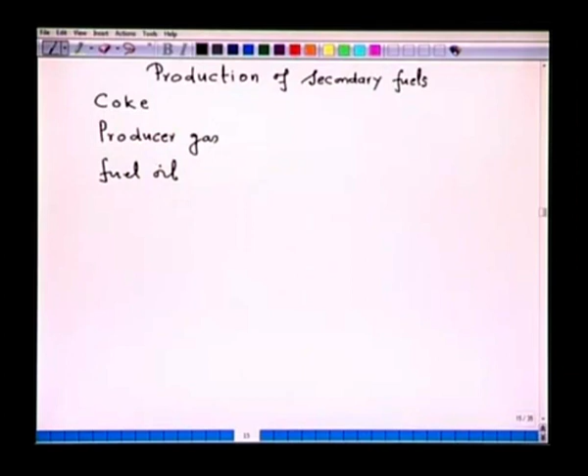So the important secondary fuels which are produced from fossil fuel: one is the coke, another is the producer gas, and third is the fuel oil. Now all these three are called secondary fuels because they do not occur as such in nature, they are derived or produced from fossil fuel, that is why we call them secondary fuel.

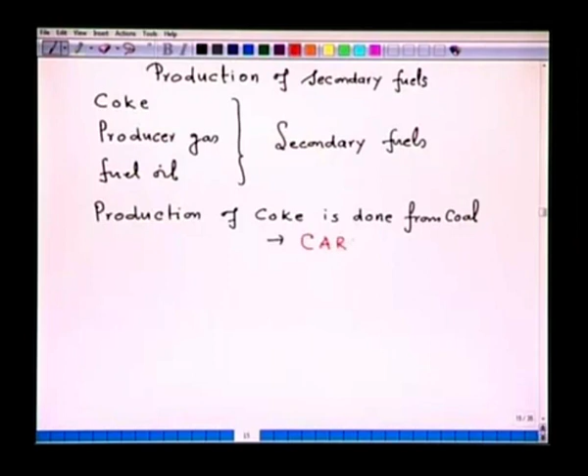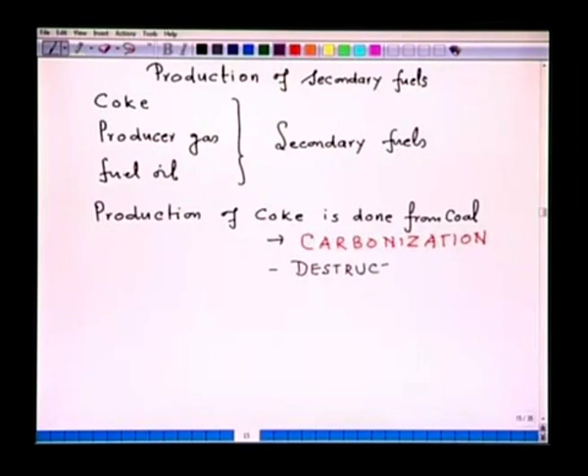Now the production of coke is done from certain quality of the coal, normally the bituminous variety of coal, and this process is called carbonization. Or this process is also called destructive distillation of coal.

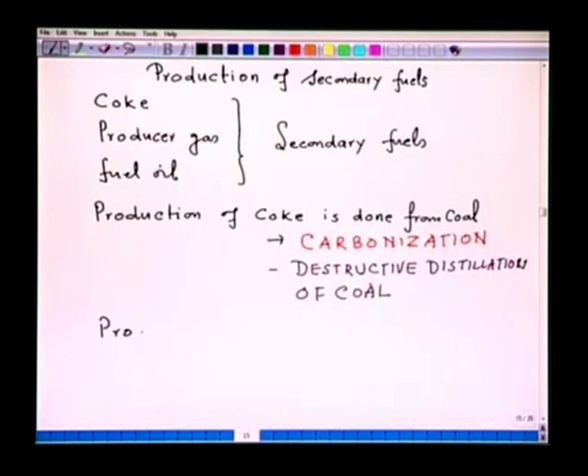For the production of producer gas, it is again done from coal, and this process is called gasification. So in gasification the solid fuel is converted into the gaseous fuel for some applications.

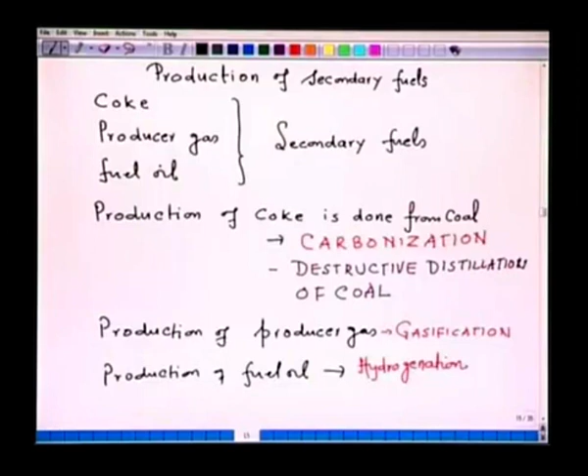The production of fuel oil for certain cases is done from coal, and this process is called hydrogenation. So from these three processes, carbonization, gasification and hydrogenation, the primary fuel can be converted into the secondary fuel, and the objective of production of secondary fuel is to meet the requirement of certain processes.

Now let us take first of all carbonization. As I have already said, carbonization is to produce coke from coal. Now why is this required? All of you are aware that in the production of hot metal by blast furnace, coal cannot be used.

Blast furnace is a counter current heat and mass exchange reactor. In this reactor, the burden which consists of iron ore, coke and limestone, it travels downward, and the upward gases flow like CO, CO2, hydrogen and nitrogen.

So in this counter current movement of burden and gases, the permeability of the bed is very important, or we can also say the permeability created by the burden throughout its downward movement is a very important issue. If the permeability is not maintained, then the upward flowing gases will not flow smoothly and choking will occur, and this is not required.

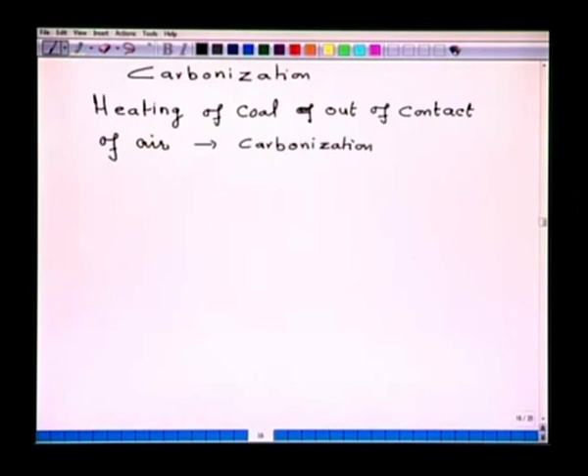Now this can be done at low temperature as well as high temperature. Low temperature of the order of 600 to 700 degrees Celsius, and high temperature of the order of 1000 to 1200 degrees Celsius. For the use of coke of blast furnace quality, high temperature carbonization is done, because what is required is to expel as much volatile matter from coal as possible, so that the coke will be of good quality. So as such high temperature carbonization is of concern for the high quality coke required for the blast furnace application, which you can also call destructive distillation.

Now what does it mean? Imagine if we heat coal out of contact of air. If you heat coal in presence of air, then it will combust and ash will form. That is not required. The whole objective of carbonization is to convert one type of solid fuel to another type of solid fuel. So what we have to do? We have to retain the solid fuel after converting it through the process of carbonization. So if we heat the coal out of contact of air, then what will happen?

If we think that coal consists of volatile matter, fixed carbon, ash and moisture.

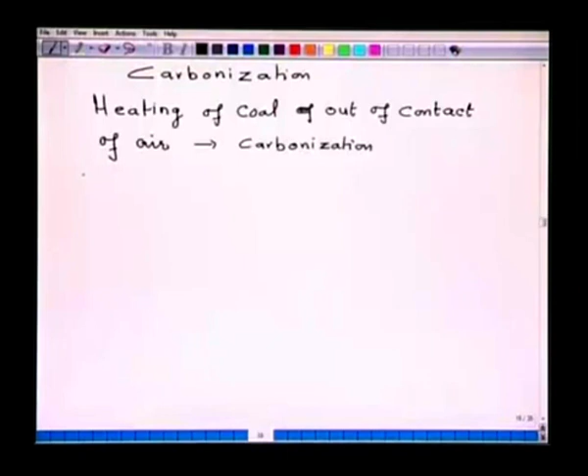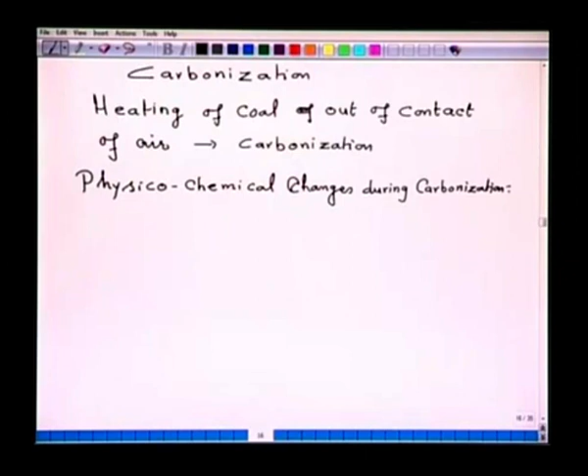So let us summarize the physico-chemical changes that occur during carbonization, as follows. You are heating coal from 25 degrees Celsius and progressively heating to 1000 or 1100 degrees Celsius. The whole objective is to expel the volatile matter of the coal, because the volatile matter creates a lot of problems if used as such for a particular application.

So stage 1 is the primary breakdown of coal at around 700 degrees Celsius, and this primary breakdown yields products like...

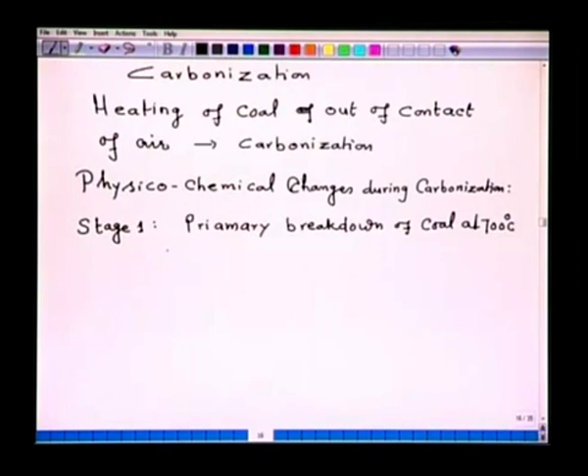H2O, CO, CO2, H2S, aromatics, paraffins, olefins, nitrogen compounds, etc.

Why does this happen? Because coal consists of carbon, hydrogen, nitrogen, oxygen and sulfur - that is what coal consists of in terms of its ultimate analysis. The organic bonds are there, so during heating the bonds will break, and wherever an element can react, depending on its affinity, it will react, and depending on the concentration they will react. Carbon is at a very high concentration, whereas the concentration of oxygen, hydrogen, nitrogen and so on is very less. So accordingly the reaction will occur: hydrogen will react with carbon, hydrogen may react with nitrogen, oxygen may react with carbon, and so on, because no air is present.

Now in this particular stage the coal also swells, because coal contains all sorts of organic compounds - it is of plant origin, so there are constituents which have a swelling tendency. Because of the swelling of the coal, these volatile matters in the form of gaseous components will be eliminated. So mind you, in the production of the coke, considerable swelling also occurs.

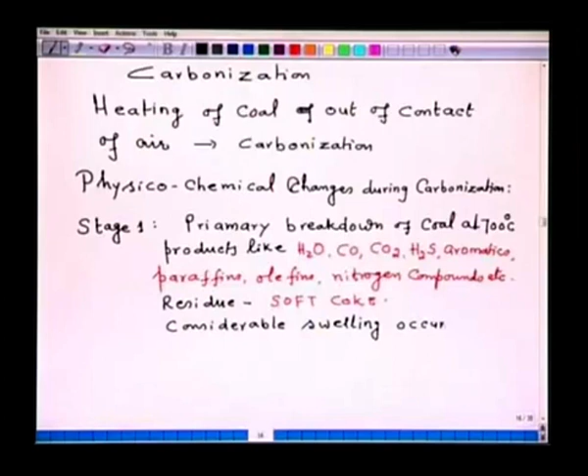In fact, swelling is one of the properties that is desired in coal which is suitable for conversion to coke. So if the coal swells, then it should resolidify to get you again the solid coke, otherwise it is gone.

Stage 2 - in stage 1 you got the soft coke, but that is not useful for blast furnace purposes. For all other purposes this coke can be used at 700 degrees Celsius, which is called low temperature carbonization. Now for blast furnace purposes you have to heat it further.

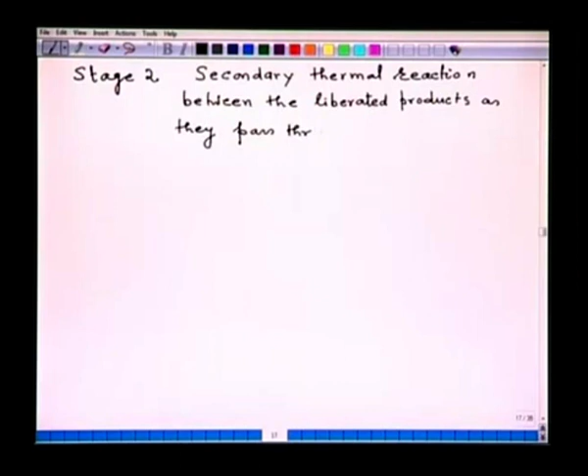So in stage 2, there is a secondary thermal reaction between the liberated products as they pass through the hot coke and coke oven walls.

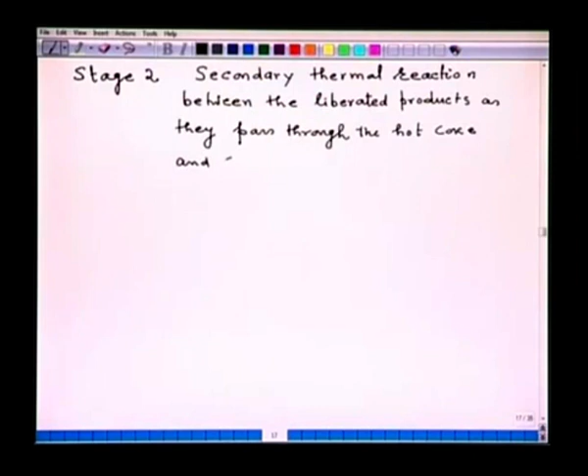As a result of this, evolution of hydrogen and formation of aromatics and methane occurs at around 700 degrees Celsius. The formation of NH3 occurs due to decomposition of nitrogen compounds.

Then in stage 3, because the residue obtained on further heating undergoes further removal of gases, since all the volatile matter has not yet been expelled at around 700 degrees Celsius. So further heating to 800, 900, 1000 and 1100 degrees Celsius causes more and more volatile matter to be expelled, and more and more gases to be formed.

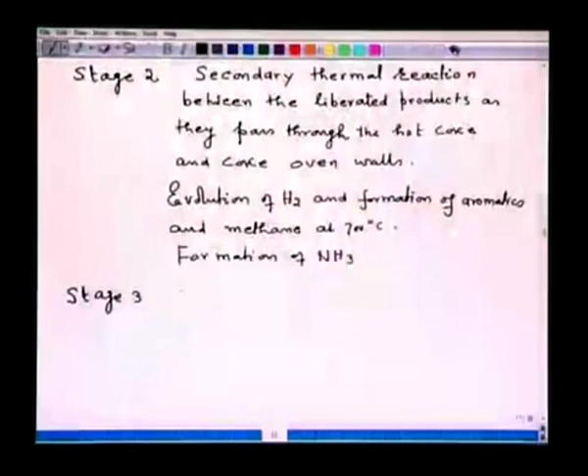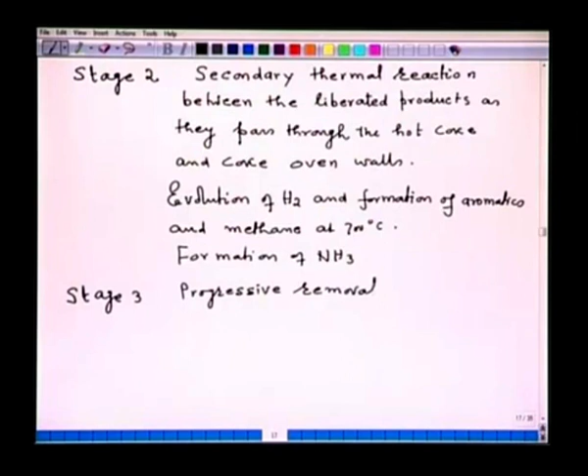So stage 3 involves progressive removal of hydrogen from the residue, and hard coke is produced.

Now these 3 stages which I have written, they occur when you heat from 25 to 700 degrees. In stage 1, further heating constitutes stage 2, and then further heating up to 1100 degrees Celsius results in so-called hard coke, which is useful. It is important to note that during carbonization...

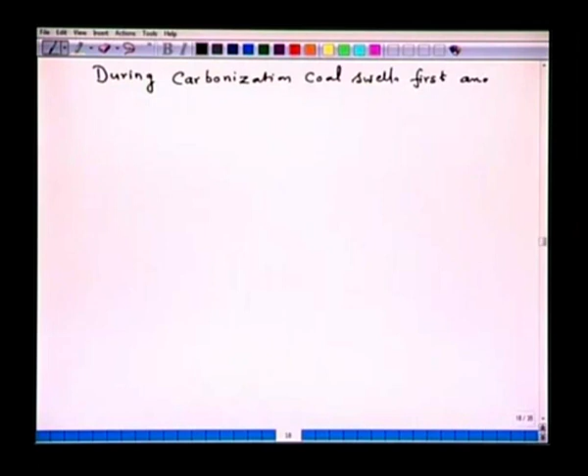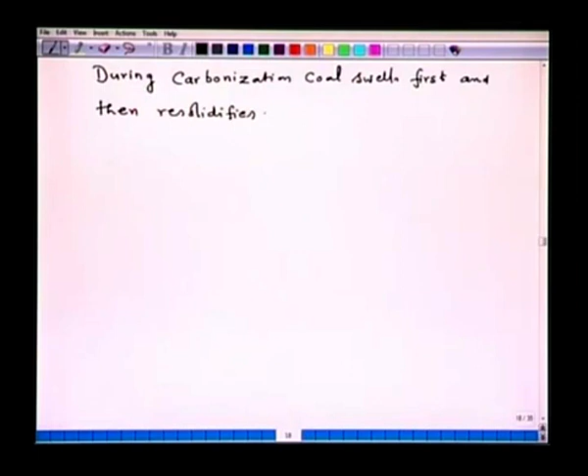Coal swells first and then resolidifies as the temperature rises, and then it is discharged from the coke oven or chamber and then cooled.

The carbonization takes around 16 to 20 hours per 22 tons of coke. So this is about the scientific aspects of carbonization.

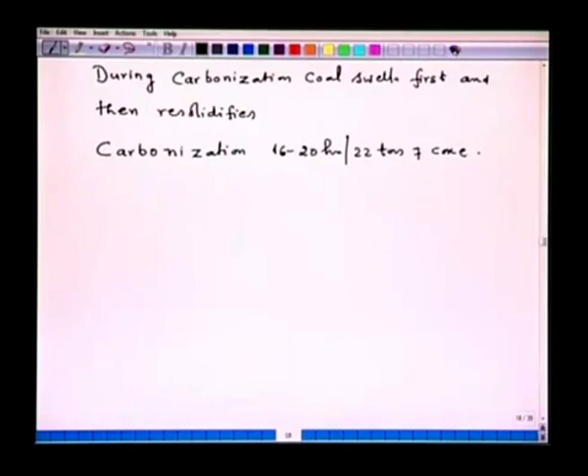What we have seen is that we want to heat coal in the absence of air. That means we have to have a reaction chamber maintained at around 1200 to 1250 or 1300 degrees Celsius, so that coal can be heated to the required temperature. We cannot heat the chamber by direct charging of the coal and combusting it there, it is not possible.

So what we learn from here is that the technological production of coke from coal must meet some requirements. The first requirement that a technology must meet is indirect heating of the chamber. So, the technology of coke production...

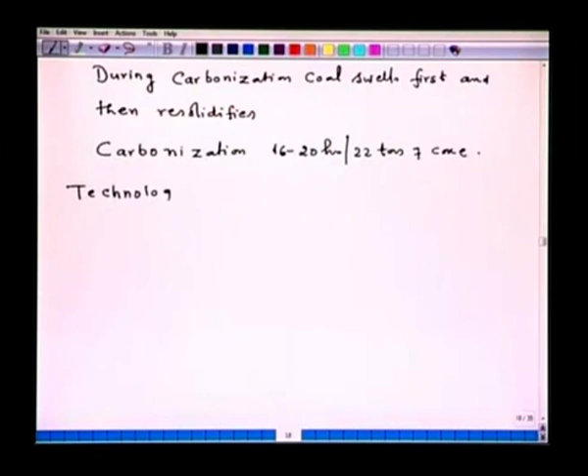Several things are needed, but what I am trying to derive are the technological concerns required after going through the physico-chemical changes that occur during heating coal out of contact with air. The first thing we note is that the coal should be heated indirectly. That means the chamber which you are going to construct cannot be heated directly.

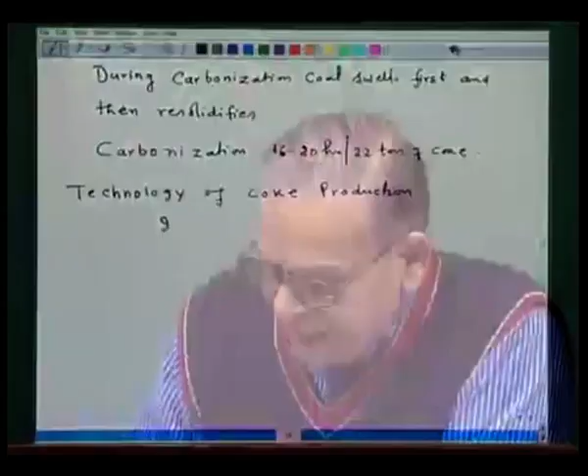Indirect heating of the chamber containing coke is required. That is the first and foremost important requirement of any technology.

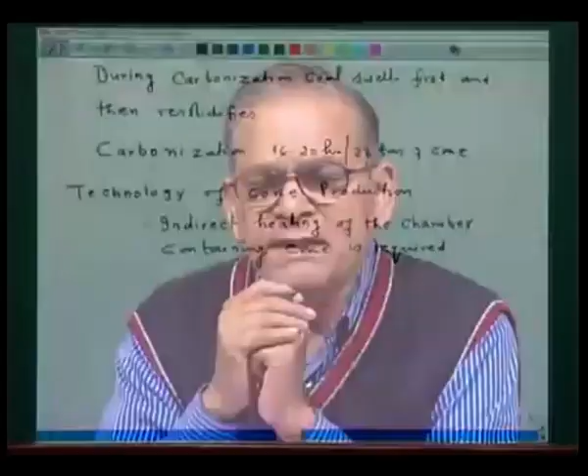The second important thing we can derive from the physico-chemical stages is how to accommodate the swelling which will occur during conversion of coal to coke in the reaction chamber. Because when you charge the coal at time t equals 0, during its conversion which takes hours together, imagine the coal in contact with the wall will swell very high, very large swelling will occur, it may stick to the wall, and at the end of the carbonization process you have to discharge the coke out of the reaction chamber.

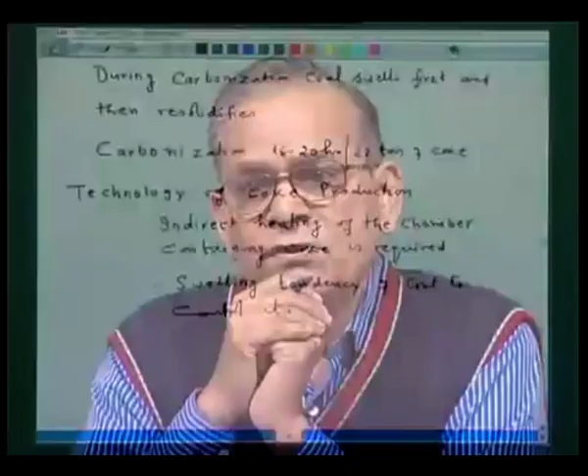So the other important issue is the swelling tendency of coal, and how to control it. One has to be careful while selecting the coal used for conversion to coke. Though swelling is required, if a particular coal swells very high, one has to blend it with a coal of low swelling tendency, so that an optimum swelling during the coking process is maintained.

Among other technological relevances, for example, are the discharge and charging mechanism, because the chamber is closed from all sides. So you have to provide doors for charging as well as for discharging.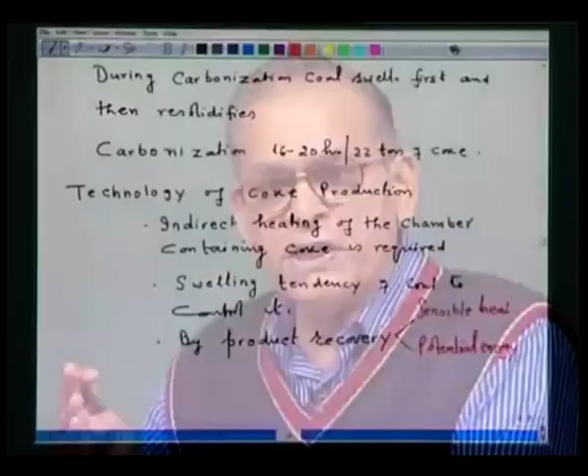So this byproduct not only contains sensible heat, but also potential energy. So an important aspect of the technology of coke production is byproduct recovery, in the sense of recovery of sensible heat and potential energy. Because the byproduct contains hydrogen, which has very high potential energy, methane, which also has a very high amount of potential energy, and of course carbon monoxide, ammonia, they all have so-called potential energy.

So the entire technology, if you think about conversion of coal to coke, should not only be limited to the conversion of coal to coke, but should also consider what is to be done with the product discharged from the reaction chamber, because the product contains a very high amount of sensible heat as well as potential energy.

Also one has to think about the product coke, when it is discharged from the chamber, it will also be discharged at 1200 degrees Celsius, and because you are not producing a ton of coke per day but hundreds of tons per day, if the discharge temperature of coke is 1200, you can calculate the amount of sensible heat the coke will have - it will have a huge amount. So what is the technology considering to do with the sensible heat of the product and byproduct, and the potential energy of the byproduct? In fact, the sensible heat of the product is also important.

Sensible heat of the product. Now, by product I mean coke, all the rest are byproducts. So while designing a technology, what do we have to consider? We have to design a reaction chamber, we have to design the byproduct recovery, and we have to see what we are going to do with the heat produced during conversion of coal to coke.

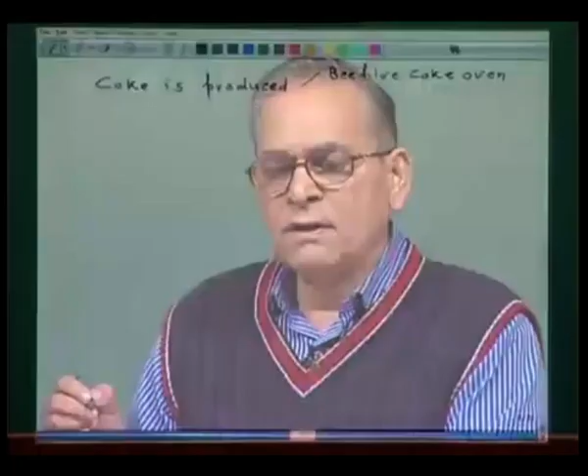So how can it be done? Traditionally, coke is produced in a beehive coke oven, where byproduct recovery was not considered important. So soon this beehive coke oven was replaced by the so called byproduct coke oven.

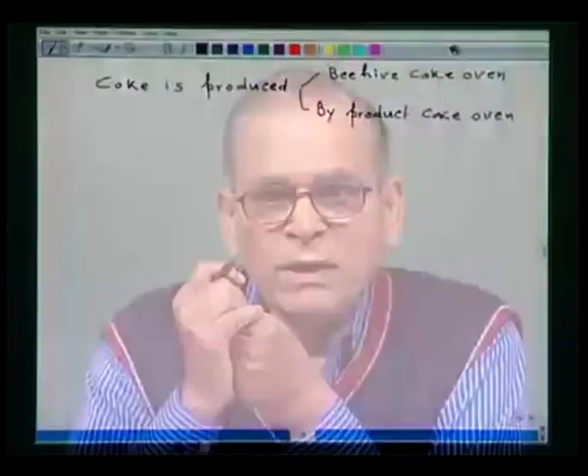Byproduct coke oven - as the name suggests, it is a coke oven which also takes care of the byproduct. Now, a heating chamber, though I earlier called it a heating chamber, you can also call it a coke oven, because here coke is produced. In fact, it is a reaction chamber heated to a very high temperature, that is why you call it a coke oven.

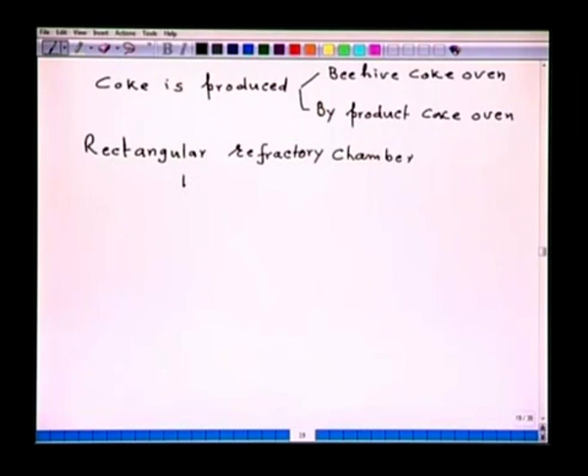So this coke oven is, in fact, a rectangular refractory chamber. The dimensions are of the order of 15 meter by 0.4 meter into 5 meter. It has removable doors at both sides. Why? To enable the hot coke to be pushed out by a ram.

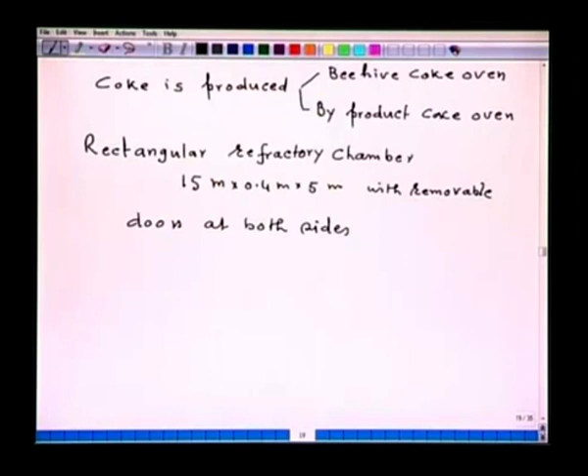Now, typical dimension of a coke oven: its length is of the order of 13 to 15 meter, height 4.5 to 5 meter - in fact a 7 meter tall coke oven is also in use. Then width, on average, it is 400 millimeter, although 600 millimeter width is also in use.

Then its width on the coke side is around 425 millimeter, and on the ram side it is 375 millimeter. Now, can you think of how this coke oven will be heated up?

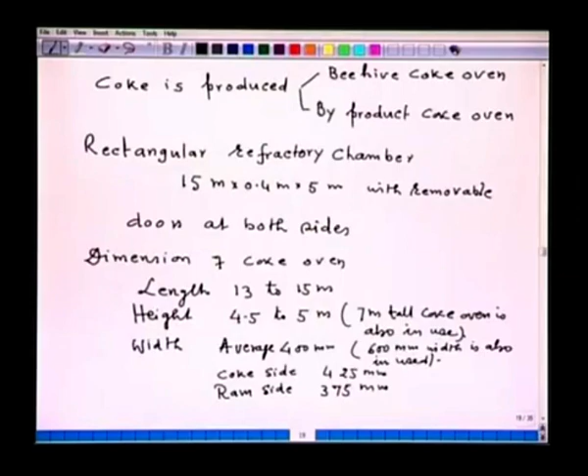You cannot heat it by creating heat inside the reaction chamber, because then air will be there and coal will burn and nothing will happen. How can a high temperature be created? It has to be created indirectly. So for that purpose, throughout the outside wall of the coke oven, flues are cut. Flues, in fact, are the flow passages for the hot gases.

Now, could you get a clue how the coke oven gets heated up? Towards the outside wall, flues are cut, and into the flues the hot gases flow. In order to create these hot gases, you have to burn air and some fuel at some location, and that location has to be connected to the coke oven chamber. The hot product gases flow into the flue. These hot product gases may have a temperature of 1400, 1500 or even 1600 degrees Celsius. The flues get heated up, and from the heat of the flue outside, heat flows inside, and through this mechanism the inside coke oven chamber gets heated up.

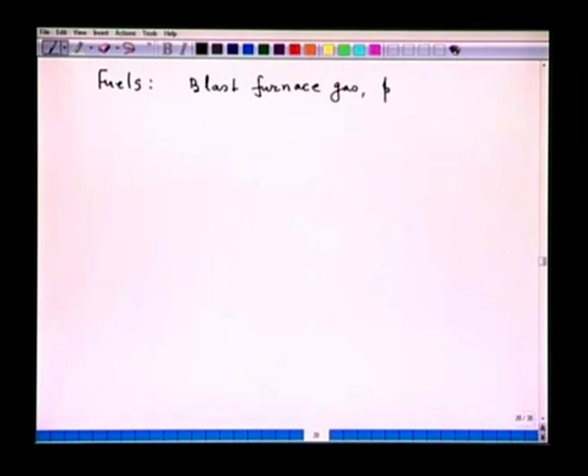So that is where the refractory wall of the coke oven chamber and its thermal conductivity is also an important issue. The fuels used for heating purposes are blast furnace gas, producer gas, and coke oven gas.

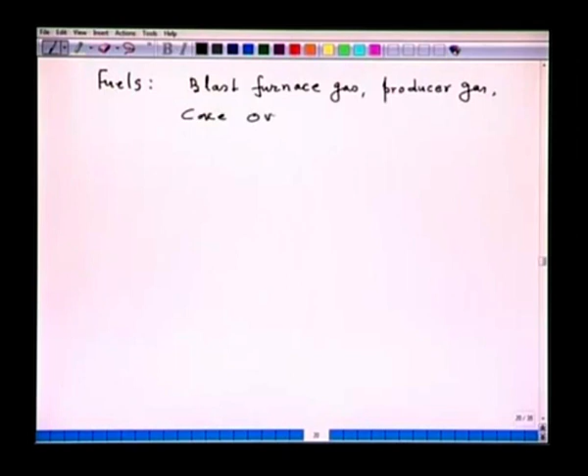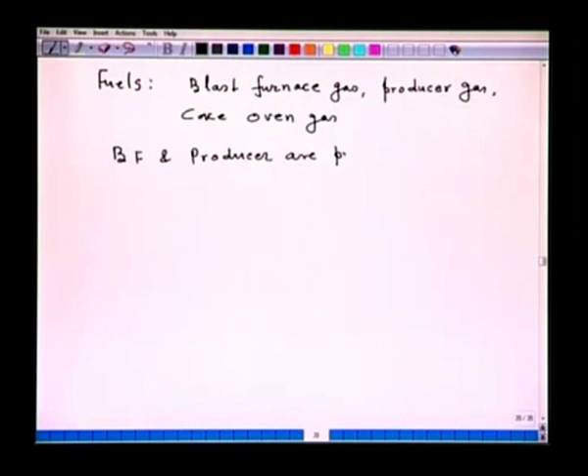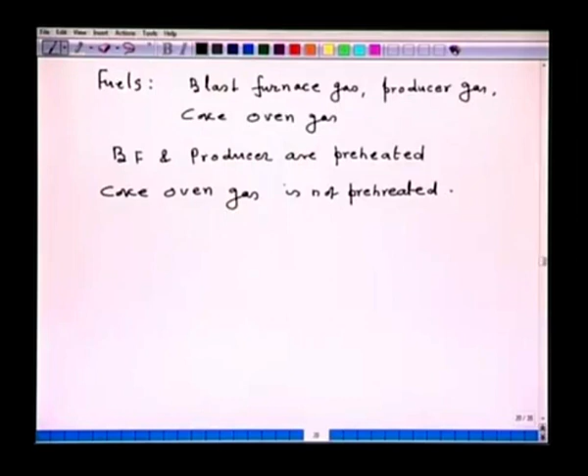Now, in this combination, the blast furnace gas and producer gas are preheated to a certain temperature, whereas coke oven gas is not preheated. Do you know why? Coke oven gas, the gas coming from the coke oven, has a very high amount of potential energy, as I already said. It cannot be preheated, because if you preheat it, the methane will decompose, forming carbon and hydrogen, and the carbon will choke the flow passage. That is why coke oven gas is not preheated.

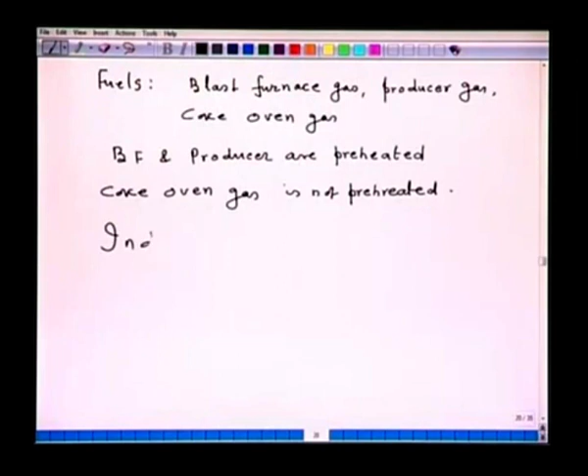As I said, indirect heating is done. The thermal conductivity of the brick is also very important, so now silica bricks are being used.

So, several byproducts are produced, and some of the byproduct tar has a very high calorific value, it can be directly used in the blast furnace or somewhere else. Then a large amount of ammonia is produced, from which ammonium sulphate can be obtained, along with benzol and naphthalene. Now we are getting the clean coke oven gas.

Clean coke oven gas is transferred to the coke oven plant for heating purposes. Now, if there is surplus coke oven gas, it is discharged and used elsewhere.

In addition to this, A and B are the regenerators. The function of a regenerator is to preheat the air and the fuel gas other than coke oven gas. So, there are two regenerators used, and they are used in cycle. C is a reversal valve. So, one regenerator heats the air and another heats the burnt gas or fuel gas.

So alternatively, one heats the air and another heats the burnt gas. They are used alternatively, and the products of combustion are put to the flue which cuts into the coke oven chamber. That is how a byproduct coke oven plant looks.

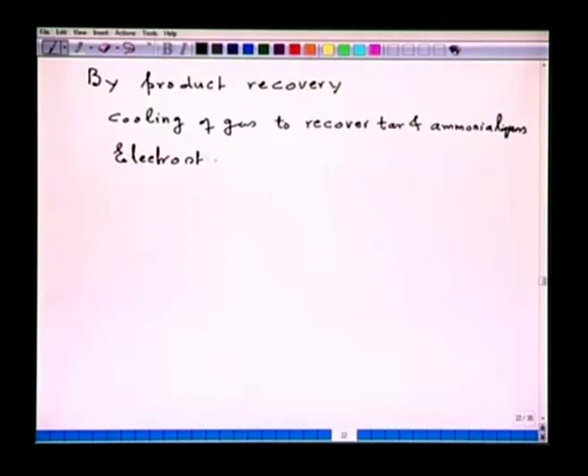Now, the byproduct recovery process: cooling of the gas is done to recover tar and ammonia liquors. Then electrostatic separation of tar in order to remove the coal or dust particles.

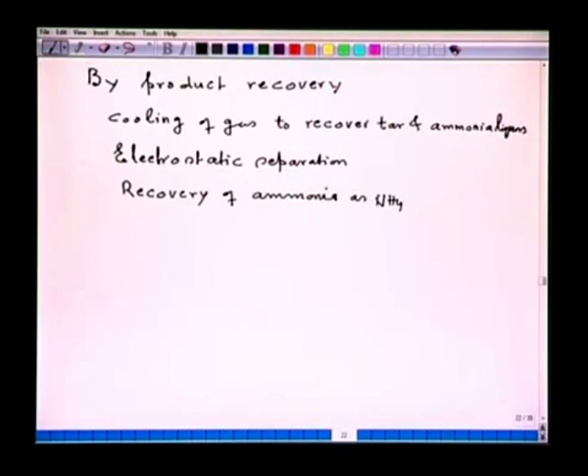Then recovery of ammonia as ammonium sulphate, which is sold to the market. Then gas is washed to recover naphthalene and benzol.

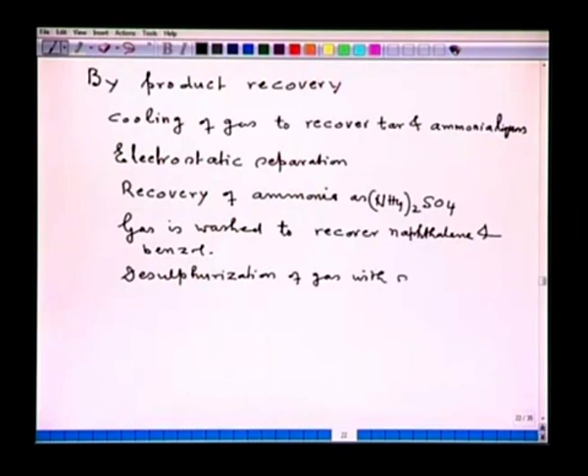Then desulfurization of gas with moist ferric oxide, and then ultimately it goes for distribution of this fuel gas to the consumers.

So, a byproduct plant or byproduct recovery plant is also considerable in size, and we try to recover as much as possible from the coke oven gas.

Now, this hot coke which is produced also has, as I said, a large amount of sensible heat. So there is wet quenching - can you imagine, a large amount of water is used for quenching, and a large amount of pollution is also created, water is being spoiled and so on. So this wet quenching is gradually being replaced by the so-called inert gas quenching.

Inert gas quenching - so these are the two methods used to quench the coke from 1200 degrees down for storage purposes. Now, as you know, this coke making process is associated with highly polluting activity.

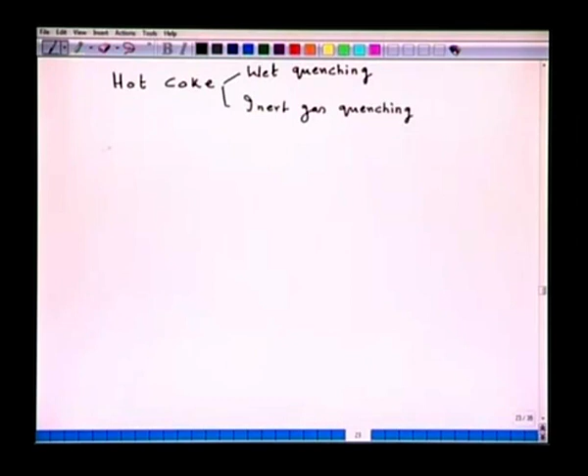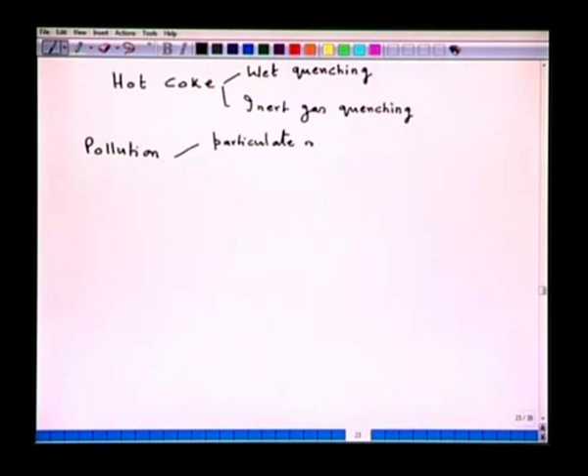So I can say coke making is a highly polluting process. Several types of pollution occur - the process emits, for example, particulate matter which is highly detrimental to health. Then they also emit volatile organic compounds. Then they also emit polynuclear aromatic hydrocarbons.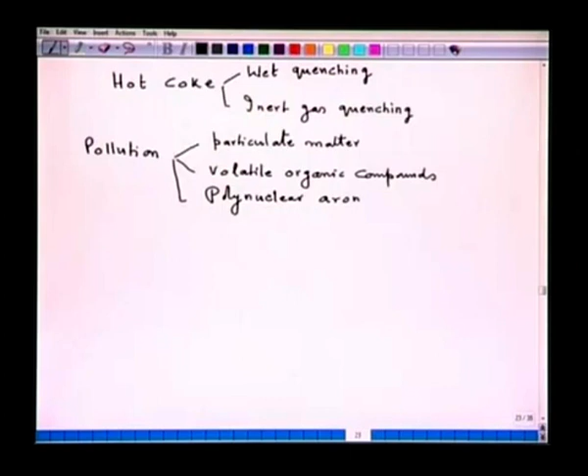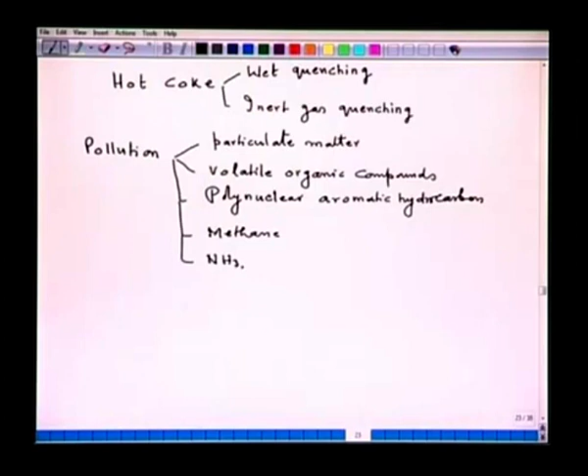Also methane, then ammonia, carbon monoxide, H2S, HCN and SOx. Several modifications took place over the years in order to reduce the pollution.

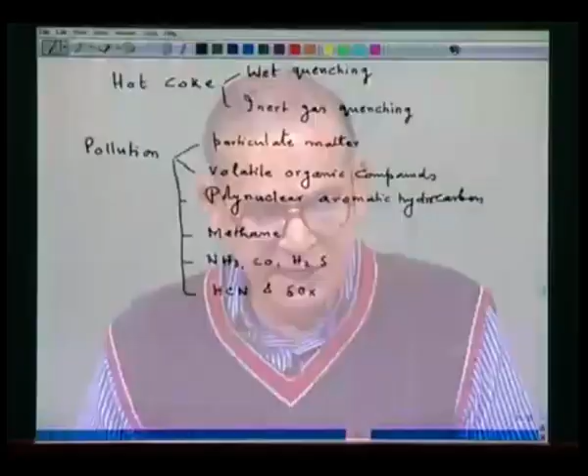So some of the developments: one development is washing of coal, to reduce the ash content of the coal. Then blending of coal - that means coal of different qualities can be blended, and this is also one of the developments. Then third is the use of formed coke.

Use of formed coke - now, formed coke is made from low rank, highly volatile non-coking coal. It is carbonized up to 500 degrees Celsius, that low quality coal. Char is obtained and that is mixed with the high quality coal, and then it is used for production of the coke.

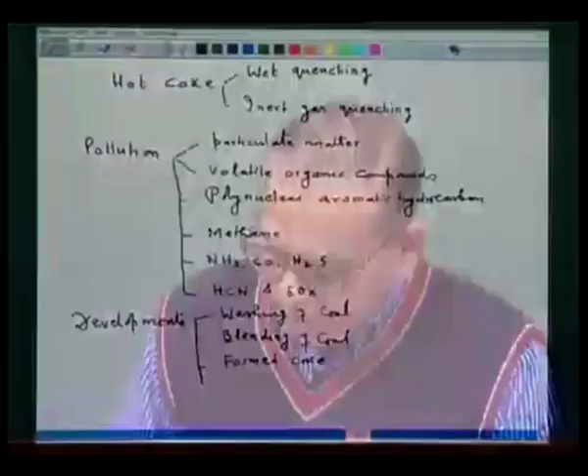Another important development which really took place is dry quenching. Now this is a very important development. In dry quenching, the hot gases which are produced are taken into the boiler to reuse the energy obtained by cooling of the coke.

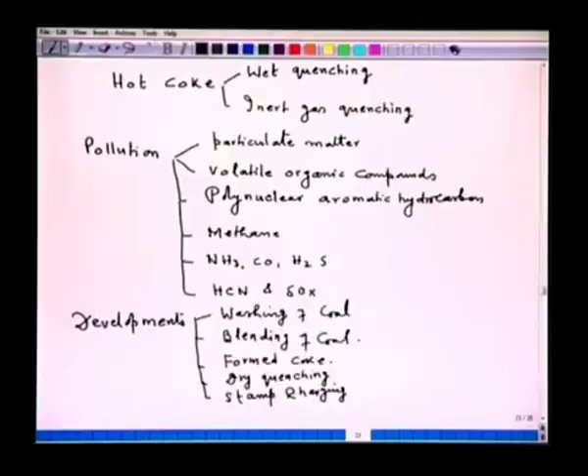Then another development is the so-called stamp charging. Now, in stamp charging, mechanically pressed coal is used for conversion to coke.

Now let me tell you certain important physical and chemical properties of coke. Mind you, the high quality coke is used in the blast furnace. Blast furnace is the main and principal user of the coke which is produced at high temperature. And for that purpose, the coke which is produced must satisfy the following properties. First, ash and moisture content.

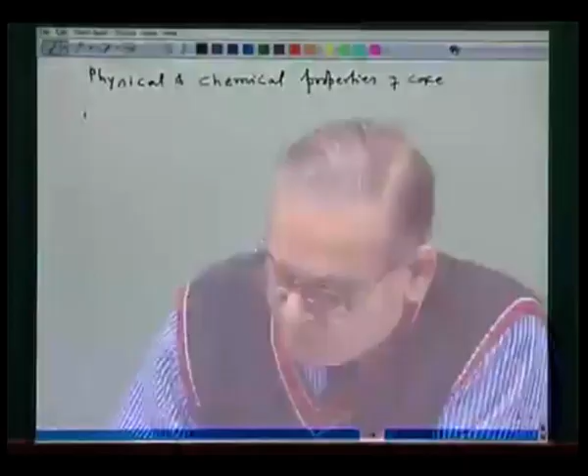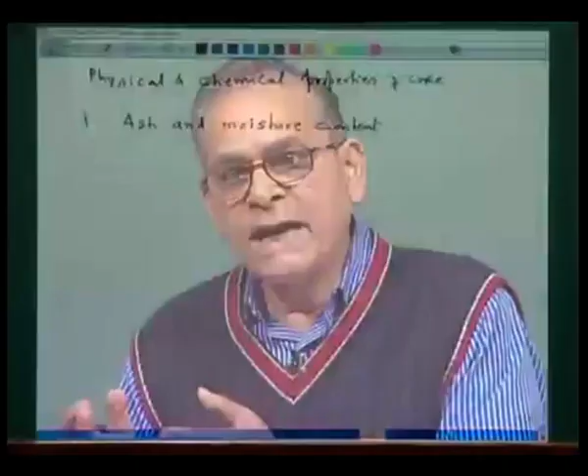Ash and moisture content: whatever amount of ash is in the coal, it will be transferred to the coke. That coke used in the blast furnace, ash has to be removed, and ash is removed in the form of liquid slag. So higher the amount of ash, higher will be the amount of slag, and accordingly the productivity and functioning of the blast furnace will be influenced. So for that purpose, that is very important.

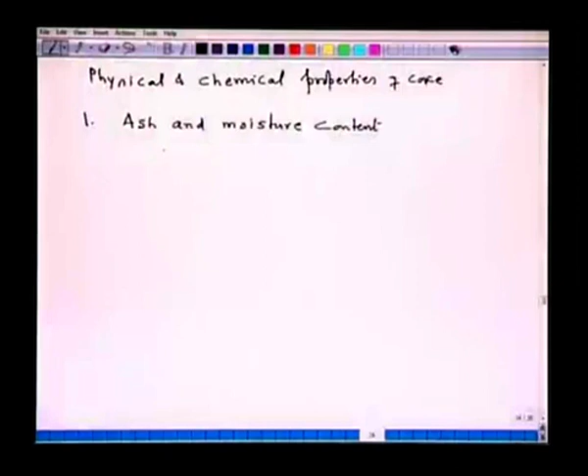Also, wet quenching is not desirable, because during wet quenching coke absorbs moisture. Even 1% H2O in the coke will increase fuel consumption by around 1.2%. So here dry quenching is desirable, because with dry quenching there is no moisture in the coke, and as such it is good.

Second important property is density and porosity. In the blast furnace, high strength coke is desirable. If the coke has high strength, then naturally its density will also be high. Complete devolatilization of coal leads to density of coke approaching that of graphite. That is, if you devolatilize completely, its density will approach that of graphite. Now, since coal contains hydrogen and mineral matter, the density of coke cannot reach that of graphite.

What is required for coke used in the blast furnace is that it should have high strength. Though with high strength you are sacrificing reactivity, the strength of the coke is more important compared to its reactivity, because coke is the only component of the burden that imparts permeability during the downward movement of burden in the blast furnace. It is the only component that remains unchanged till it comes down to the tuyere level. Iron ore and limestone react and change, so permeability is mainly influenced by coke, because coke reacts only at the tuyere level, and from there its appearance vanishes. That is why the strength of coke is more important compared to reactivity.

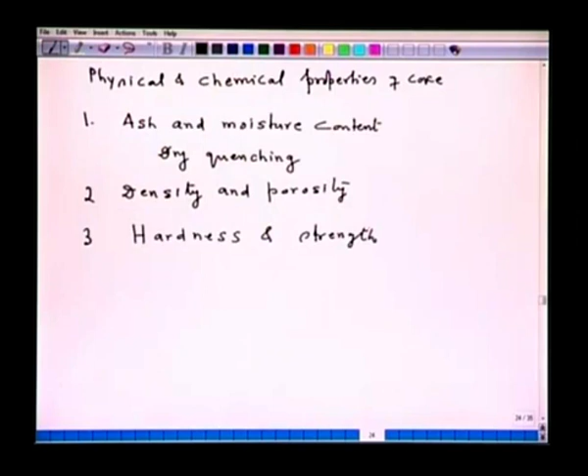Third, hardness and strength. This is required for resistance to impact breakage, because the coke is falling from a height in the blast furnace from the top. Before it reaches the tuyere level, it has already travelled around 15 to 20 meters of height. So it is falling under gravity, and it has to sustain the upward flow movement of the gases. It has to have high strength so that it does not break during impact. For that purpose, shatter index or shatter test is done to check whether it is suitable for blast furnace feed or not.

Fourth important thing is the reactivity of coke. For reactivity, coke should be porous, so that the oxidizing component of air can diffuse and the carbon can react. But more porosity is good from a reactivity point of view, while it is not good from a strength point of view. So an optimum has to be reached, because the most important part of the coke is strength. If it breaks during its downward movement, it will affect the permeability, and the whole smooth functioning of the blast furnace will be influenced. So strength is more important. Of course, reactivity is also important, but one has to compromise here.

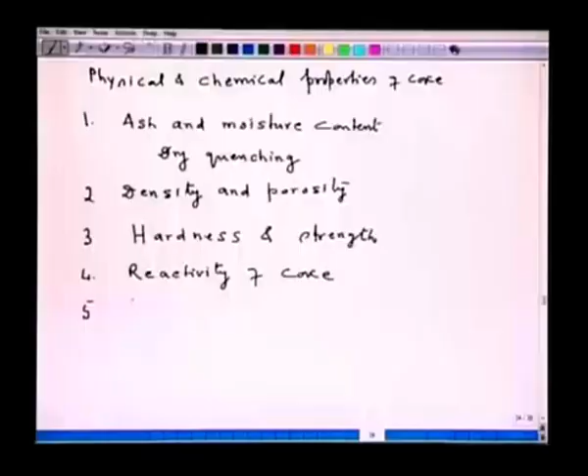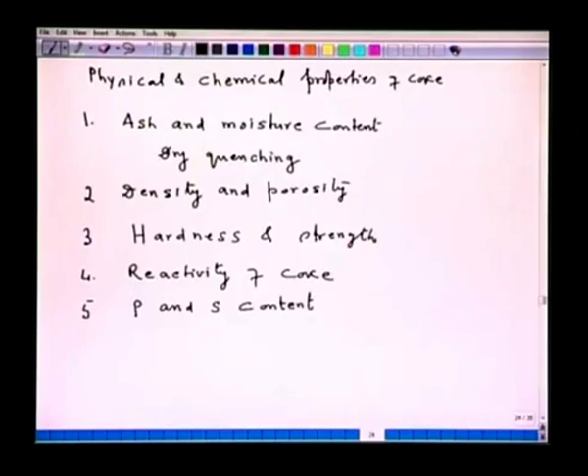Fifth important thing is phosphorus and sulfur content. Whatever elements are there in the coal, after reacting, the same will be transferred into the coke. So if the coal contains ash, the entire amount of ash will also be transferred into the coke, because ash is not removed at all. Whatever elements are there in the ash, sometimes containing sulfur, then all the sulfur and phosphorus will also be transferred into the coke, and as such the processing of hot metal in the blast furnace will be influenced. So control of sulfur and phosphorus is not only desirable, but very important.

Sixth important point is the ash. As I have already said, the ash content should be as minimum as possible, because an increase in ash content will increase the volume of slag, and accordingly productivity will be affected.

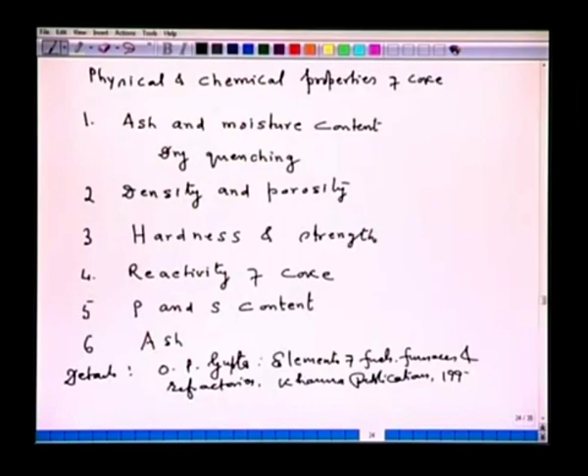If you want further details, you can look at the book by O.P. Gupta, Elements of Fuels, Furnaces and Refractories, Khanna Publications. The edition I have seen is from 1997. So in the next lecture we will be doing the material balance of coke oven.